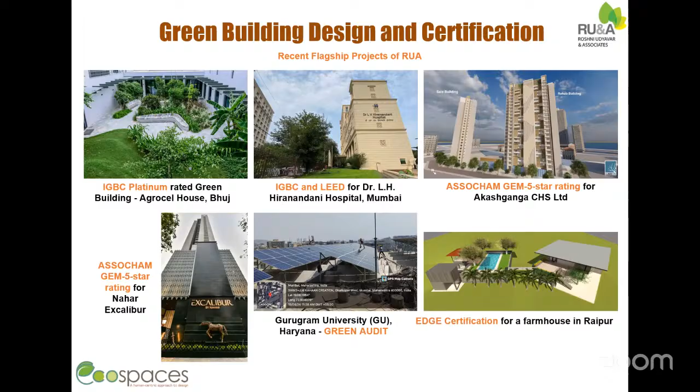So, water. Water is among our most essential resources, yet it is becoming increasingly scarce and unpredictable. Cities worldwide are grappling with water stress driven by urbanization, population growth, pollution, and climate change. Closer to home, India is already feeling the effects. This year, several regions of Maharashtra, including Mumbai, experienced delayed monsoons, raising concerns about reservoir levels and long-term water security. A reminder that fresh water cannot be taken for granted.

As architects, planners, engineers, environmental professionals, industries, institutions, and citizens, we all have a role to play. Wastewater treatment and reuse are no longer optional. They are essential to resilient and sustainable urban development. Today's webinar explores how modern treatment technologies, innovative solutions, regulatory frameworks, and best practices can help us move towards a future where water is conserved, recycled, and reused responsibly.

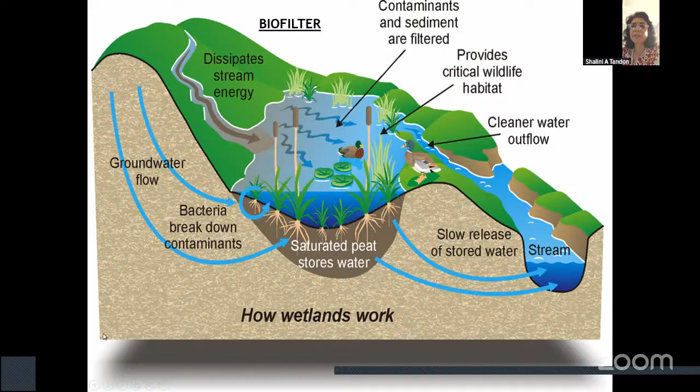So what we are doing is we are just mimicking this natural biofilter in an urban and a rural setting. Next slide, please. Now, role of wetland plants. Wetland plants are natural cleansers. So what we use are wetland plants which are rooted and emergent.

Now, these plants have an aerenchymatous tissue, which is an air space system within the roots and the shoots of the plants. This functions like a reverse chimney. It transports oxygen from the outside atmosphere via the shoots to the roots for root respiration, and the gases which are generated in the media are transported via the roots to the shoots to the outside atmosphere. So that is why we need to select wetland plants for remediating wastewater.

Nutrient uptake is governed by the rate of respiration of the roots, so selection of plant species is important. The more extensive the root structure, the more is the rhizosphere area, the more is the interactive area, and more cleansing will happen. Next slide, please.

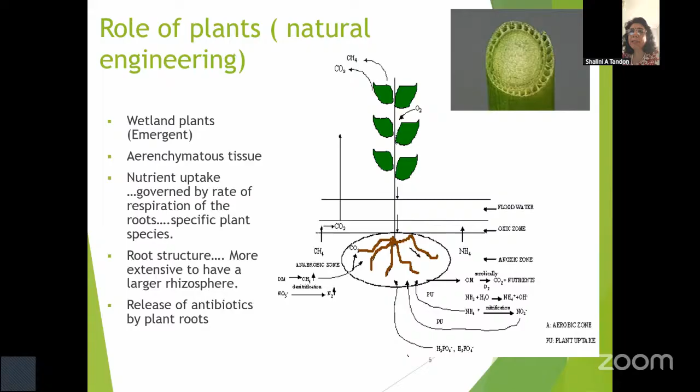So there are various wetland plants that can be used, which are locally available. There is elephant ears, colocasia, we have palm umbrella, we have cattail, canna, spider lily, cyperus, scirpus, many. Whatever is available locally should be used as it is adapted to the local climate.

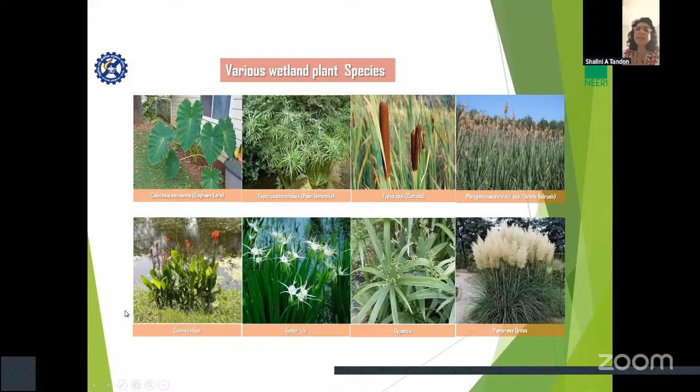Next slide. Now, hydrophytes, getting a little in depth of it, hydrophytes have special characteristics, especially those plants which are submerged and floating plants. They have a thin cuticle, stomata are open most of the time. They have a large number of stomata on either side of the leaves, and they have a less rigid structure because of the water pressure which supports them. They have flat leaves for flotation.

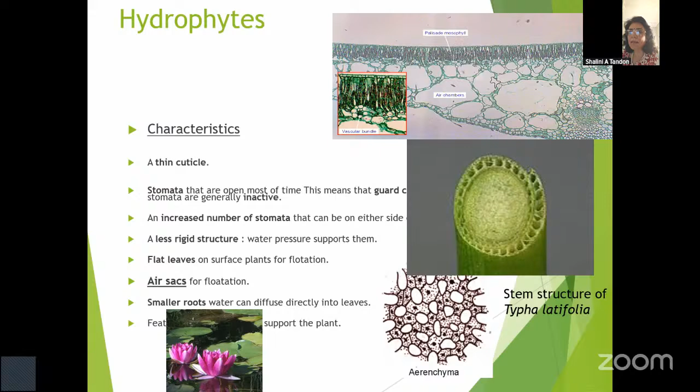Air sacs are a very important feature, and they have smaller roots because they don't need deeper roots to take up water. So these plants have special characters which make them suitable for remediating a wastewater system. Next slide, please.

Okay, so I'll be talking about two types of engineered wetlands: surface flow engineered wetlands and subsurface flow engineered wetlands. Now, surface flow engineered wetlands have a soil or a gravel bed, and the wastewater flows along the surface, allowing settlement of solids and coming into contact with the microbial population on the surface of the media and the plant shoots. So, the lower part of the plant shoots is in contact with the wastewater that needs to be treated. So as it passes through this, it gets cleansed and we get much cleaner water in the outlet.

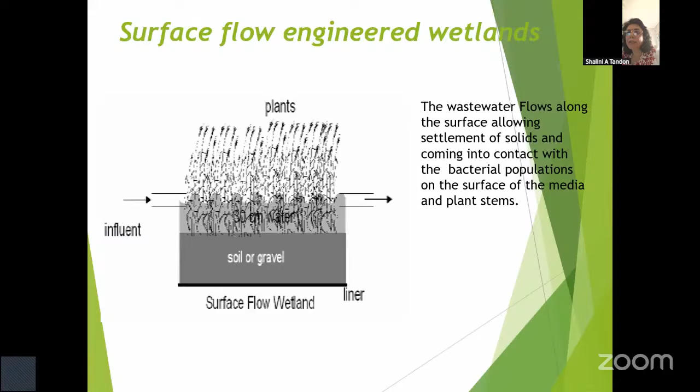Next slide, please. The second is the subsurface flow engineered wetland system. Here, the wastewater flows through the soil or gravel bed media and comes in contact with the microbes on the roots and on the media. An inlet zone of large media ensures influent liquid is distributed effectively into the media, and a similar outlet zone collects the treated liquid in a drainage pipe. So, in this case, you can't see water flowing over it. Everything is happening beneath the surface.

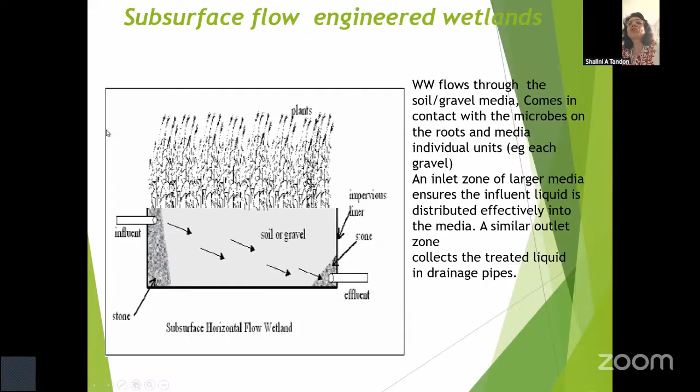So, the advantage is that a larger volume of wastewater is being exposed to the gravel bed or the soil bed and the plant roots. So efficiency becomes much higher. Now the basic, next slide. The basic units are a sedimentation tank, a planted bed, and a treated water collection tank.

In the sedimentation tank, the wastewater is collected and the suspended settleable solids will settle down, and the overlying wastewater having dissolved organics will be transferred to the planted bed where you have emergent rooted wetland plants in a gravel bed system. As it passes through it, the nutrients are taken up by the plants. The microbes will act on the organic matter and convert it into nutrients in the plant available form, and the treated water then moves out into the collection tank.

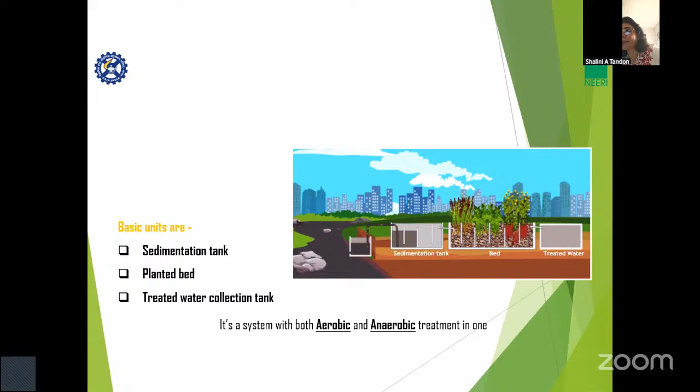Next slide, please. This is the planted bed, which has graded gravels and baffles. Now, these baffles actually provide a sinusoidal movement of wastewater through it. So, when the wastewater enters the system, it goes vertically down, then it flows horizontally, then vertically up. And like that, in a smaller surface area, we can have a higher treatment time. The footprint reduces. And as the water passes through it, it interacts with the roots, the microbes, and the plant will take up the nutrients.

The microbes will act on the material, will convert different forms of the plant nutrients, organic matter nutrients, into available form, and these are taken up by the plants. And likewise, the water that you get from the outlet is much cleaner, has much lower COD, BOD, even the fecal coliforms are less, and the nutrient level is also less.

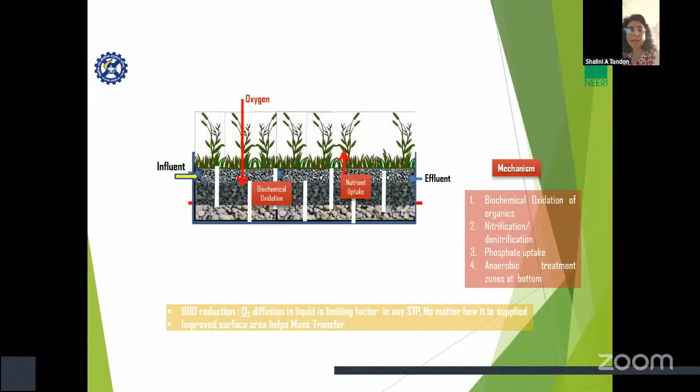Next slide, please. So I've been working on phytoremediation and bioremediation for a number of years, and there are a lot of research papers, a lot of work I have done. And now in this webinar, I had to select what to show you all. So actually, I've selected only two, three things which I have done for this presentation.

So this is a phyto-bioremediation system, and this work was on methane emission potential and increased efficiency of a phytoremediation system bio-augmented with a bacterial species. Now, this bacterial species I had isolated from municipal wastewater which was being treated in an engineered wetland, and from there only I isolated it.

And in the horizontal subsurface flow constructed wetland mesocosm study, the mesocosms, which are designed to treat municipal wastewater, were bioaugmented with Bacillus firmus. The efficiencies of the mesocosms were assessed. We had a non-vegetated mesocosm, a constructed wetland with Schoenoplectus validus wetland species, and the third one was with Bambusa vulgaris, and they were assessed.

We found that bioaugmentation not only enhanced the efficiency of phytoremediation, the cleansing capacity of the system, but also reduced methane emission from the planted mesocosms.

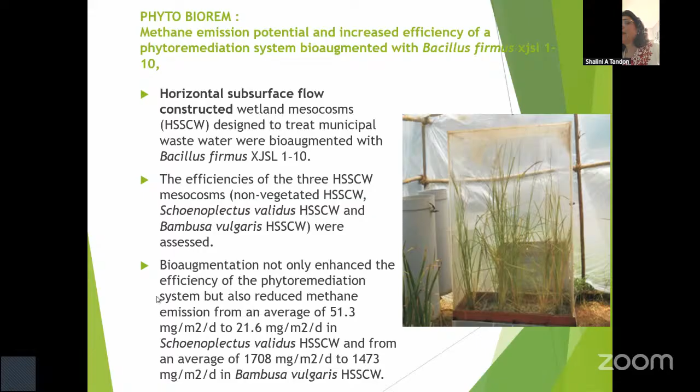Next slide, please. Another study was optimizing the use of a bacterial species for treatment of municipal wastewater. A bacterial strain was isolated again from municipal wastewater. The isolated strain was used for treatment of sewage in system one, an aerobic system provided with external aeration, and it was also immobilized. It was immobilized as calcium alginate beads, and later on I immobilized it on polyurethane foam also. And we got around 50% higher BOD and COD removal over the non-bioaugmented systems.

Now, immobilization becomes important because each time you don't need to add fresh inoculum, and it doesn't come out into your treated effluent. So that becomes easier. And also in the immobilized form, they are more resistant to stresses, more resistant to toxic substances and antibiotics if they are present in that water.

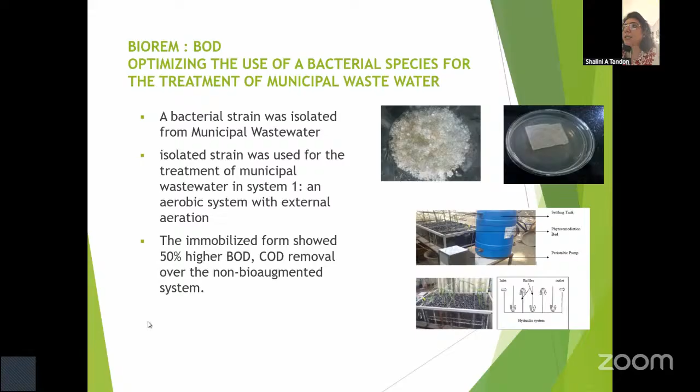Next slide, please. System two consisted of an upflow aerobic reactor without external aeration. And we found with 10% inoculation, the removal of BOD and COD was 30% higher than in the non-bioaugmented system.

Next slide, please. The third study was on removal of chromium. You know that wastewater has heavy metals also; it's a big problem. We did a study on Ochrobactrum pseudintermedium, which I isolated from municipal wastewater, for the removal of hexavalent chromium through different immobilization techniques. Chromium 6 is one of the toxic heavy metals which persist in the ecosystem. Heavy metals cannot be degraded into non-toxic forms, and they continue to create serious global health concerns.

A bacterial strain isolated and identified as Ochrobactrum pseudintermedium was found to be tolerant to concentrations of chromium 6 up to 600 milligrams per liter in nutrient media. Calcium alginate and polyurethane foam were two different materials used for immobilization. At a higher inoculum concentration of 5%, removal of chromium 6 increased, showing 82 and 86% removal by the calcium alginate and polyurethane foam methods.

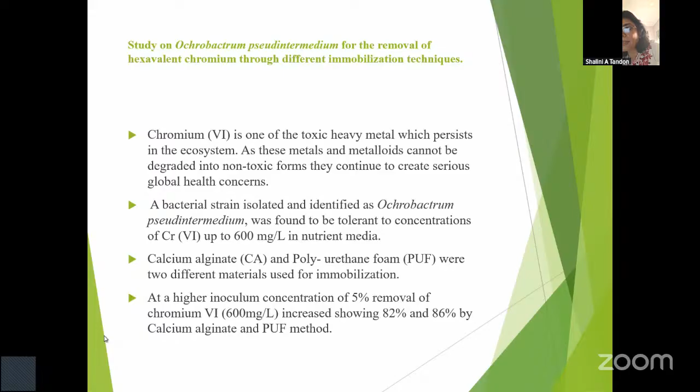Why am I telling you this? Because if we have certain specific bacteria which are efficient in removal of a particular contaminant, we can immobilize them on the support media. And we can use that support media as a bed material in a phytoremediation system. So as the wastewater passes through it, with the selected plants that we are using, the wastewater will get cleansed more. That particular contaminant will be removed more efficiently.

More efficiently means if it takes, say, 2 days for it to be cleaned, it can be cleaned in, say, 12 hours. If you just use it randomly, then biofilms of all different kinds of bacteria will be formed on the media, so the removal efficiency of the contaminant will be much lower.

Now, why are phytosystems so important? When we compare them with the conventional treatment systems, the percentage of BOD removal is highly comparable. And in a phytosystem, you won't find sludge formation, which is there in other systems. The equipment requirement is also minimal. And operationally, we don't need a skilled operator to maintain it. Even a gardener can look after the system because it integrates into the landscape.

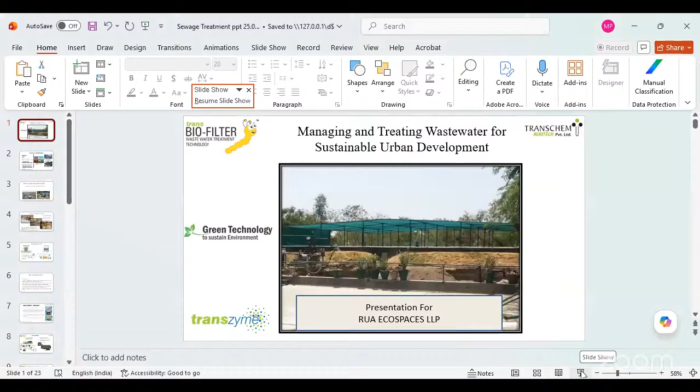So, Roshini has set a good tone in the beginning regarding the main objective of organizing this webinar: to understand the managing and treating of wastewater for sustainable urban development. Now, when we talk of any wastewater, it is very important for us to understand the sources of... I'm not able to.

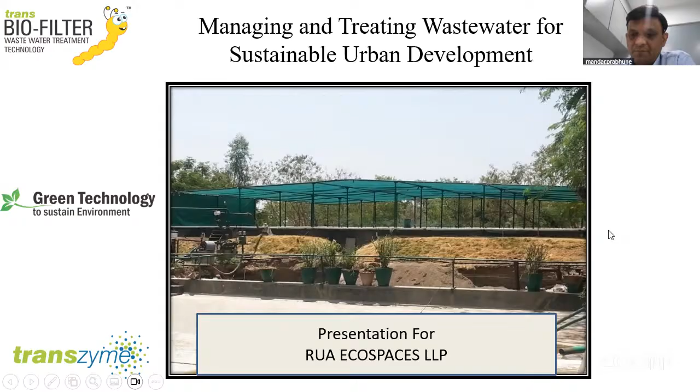So it is very important for us to understand the various sources of wastewater. So any kind of human activity generally generates the domestic wastewater. So maybe it would be from the household activities, from the institutions, from hotels, from corporates, from industries, from everywhere, wherever we have any human activity, the wastewater generation is going to happen.

So whenever we generate this kind of wastewater, it is very important for us to understand what are the different characteristics of wastewater. Because unless we understand the characteristics, it will be very difficult for us to design any kind of a treatment system. So if we just have a look on the basic characteristics, mainly the domestic wastewater, which is coming from the household sources, basically contains almost 99.5% of water and only 0.5% of suspended solids.

Now, these suspended solids are the biggest threat to the environment because they contain the human waste, the residuals of the food what we generate from the household activities. There are certain kinds of chemical contaminants which come mainly from the use of detergents, from various medicines and other personal care products. All those come as excreta out of our household activities. So if we want to design any kind of a treatment system, we need to understand properly the wastewater characteristics.

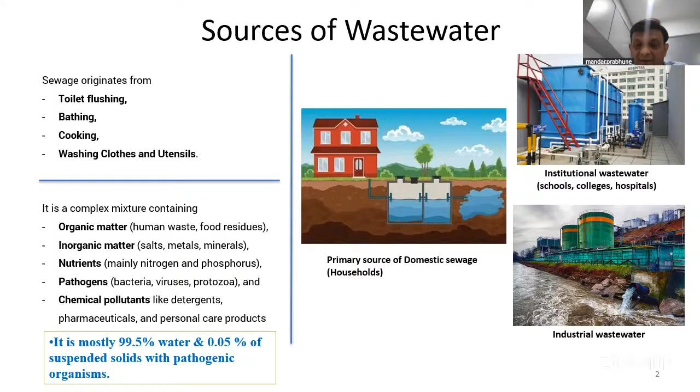So what is a sewage treatment plant? So any kind of a facility or a process where we can treat the sewage is basically known as a sewage treatment plant. So like we have industrial effluent treatment plants, when we talk of domestic wastewater, we call it a sewage treatment plant. So the sewage treatment plant can be established at various levels, maybe at the town level, at the city level, or in the urban, rural areas, or in various industries, hotels, institutions, colleges, schools, etc., from wherever it is generated.

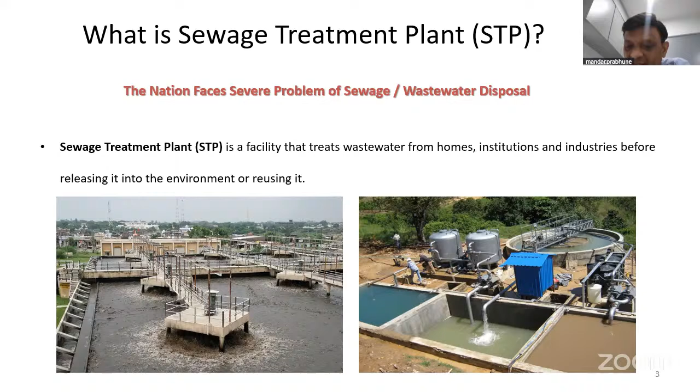So why do we need to have a sewage treatment plant? So basically to protect our water bodies like rivers and lakes, to prevent the water pollution, to protect the human health. And of course, if we try to treat this, then definitely this water can be reused back. So that is the reason we need a proper, well operated and well functional sewage treatment plant, because when we talk of characteristics, I told you that 99.5% is water. So if we are able to reclaim this water after proper treatment, the whole 99% of water can be recycled back. And the recycling can take place at various places.

It can be used for various applications like gardening, for landscaping, for toilet flushing, for industrial applications. So there are a number of applications where we can use this reclaimed or reused water. So basically these STPs remove the organic matter, the solids, the pathogenic organisms which are mainly harmful to the environment, and other pollutants are treated in the sewage treatment plant.

There are various technologies which are available for sewage treatment. So the conventional methods like MBBR or SBR, or MBRs are the latest technologies where we can treat the sewage properly. Also, there are certain green technologies and natural systems like constructed wetlands. Dr. Shalini also just mentioned phytoremediation. So phytoremediation also is one kind of a constructed wetland. It is also commonly known as root zone technology or the Phytorid technology.

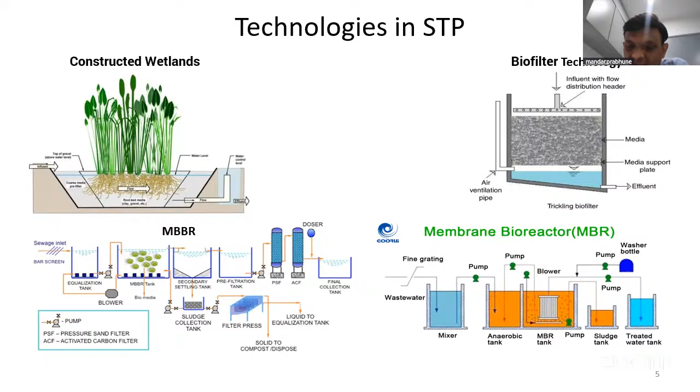Similarly, we have a biofilter technology which we have developed over the last 10, 15 years. And after studying various technologies and their limitations, we have tried to develop such a technology which is able to take care of all the limitations of the other systems.

So the basic requirement today is of decentralized sewage treatment plants because, when we talk of the centralized STPs, there are a number of challenges and limitations to handle a huge quantum of sewage which is generated and transported from one place to another. So it not only costs much, but also it allows a lot of leakages in the sewerage system. So that is the reason there is pollution on the land also, and when it comes in contact with the water bodies, it contaminates. So it is always better to treat the sewage at the source. And when we talk of at the source, then the decentralized or the smaller systems come into picture.

So if you want to really reuse the water, the decentralized systems will be much better to handle, also in terms of the volumes, and of course you get recycled water there itself. So there are a number of advantages if we can plan properly decentralized STPs, and in many of the regions there are no properly laid sewerage lines.

So that is the reason you see the pockets of wastewater like in small ponds or some kind of ditches which are there, and there the treatment is not happening, and that is the reason we face the water pollution issues. So if we really want to reduce the issues of wastewater, definitely we should think of decentralized systems, and particularly in a country like India, the decentralized systems are much more effective than the centralized systems.

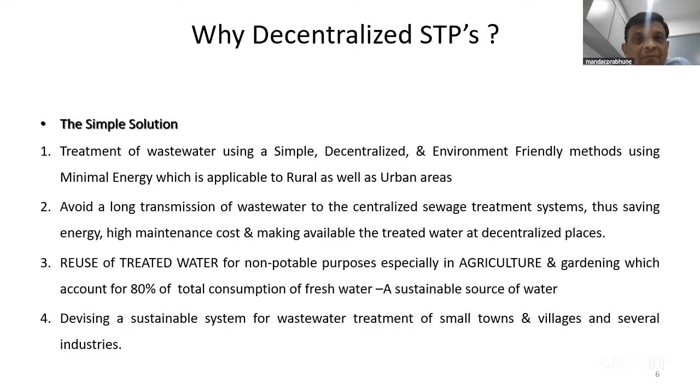So here today I will be talking to you about the biofilter technology which we have developed over the last 10-15 years. And basically the idea is to develop such a technology which is much more user friendly. It is completely green, and that is the reason our concept is design with nature. So that is how the natural system works best, but definitely we have also taken certain scientific learnings from modern science, so that combining both nature and science, we are able to get a

very effective treatment system. So basically, the biofilter system utilizes the ability of the earthworms and beneficial microbes. We have developed specialized microbial cultures known as transzyme, where the organic waste is broken down into harmless components, into available nutrient forms. So here the main processes take place, which are mainly adsorption, filtration, and biological degradation.

Here we use specialized media, which is completely organic in nature. The main function of the media is to adsorb the suspended solids which are present in the wastewater. Unlike in other systems where you require a sedimentation process earlier, in our system there is no requirement of sedimentation. All the suspended solids present in the wastewater act as food for the earthworms, and in turn earthworms digest those suspended solids and convert them into good compost and generate millions of beneficial microbes which are mainly required for the biological degradation process.

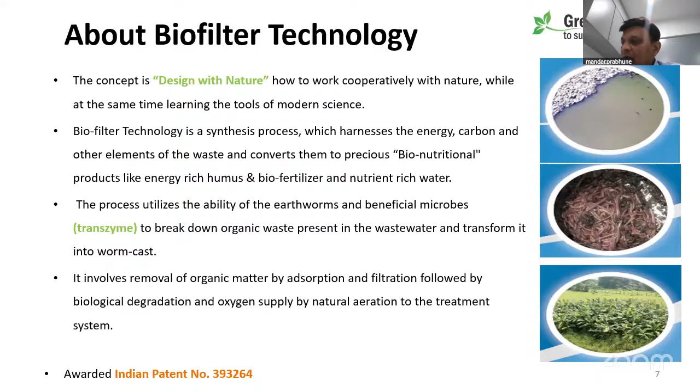Recently we have also got the patent on this technology, so our Indian patent number is also mentioned in the presentation. So if you see the comparison between the conventional STPs and the biofilter system, you can see in conventional there are a number of unit operations. Like you require primary sedimentation tank, the aeration tanks. Then after the aeration tank, you require clarifiers, and then the disinfection system.

While the biofilter system is a one-step reaction or process where you don't require a sedimentation tank. You just have to put a strainer which can take care of the non-biodegradable material like plastics and some other glass or metal parts, which are removed through the strainer, and only the biodegradable wastewater is treated through the biofilter system. So in one step you are able to treat the sewage, and it's a continuous process, and the retention time is just 45 to 60 minutes to treat the water.

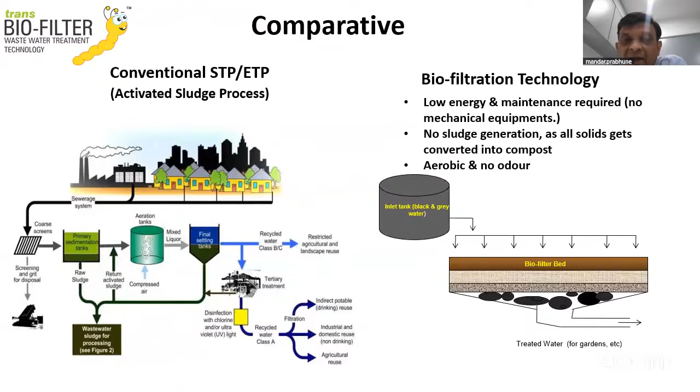And of course, the advantages are that it requires very low energy. There is not much maintenance required because there is no mechanical equipment. We don't require any aeration system or diffusers to be installed in the system. And as there is no sedimentation tank required, sludge is not generated. All the solids are converted into good compost with very nutrient-rich components, which can directly be used as a solid fertilizer for landscaping, or even for agriculture purposes. And it's completely aerobic, and there is no odor in the system.

So as I mentioned, it generates nutrient-rich water, vermicompost, and earthworm biomass. There are no chemicals added in the process, absolutely low maintenance and low energy input, as there is no mechanical equipment used. No unhygienic sludge disposal required because all the suspended solids are converted into good compost. There is no odor, no noise in the system, very less HRT in comparison to the conventional system, and it can be implemented at decentralized level with economy of scale.

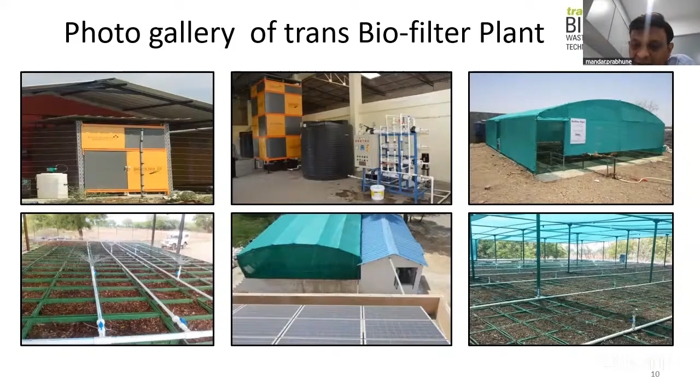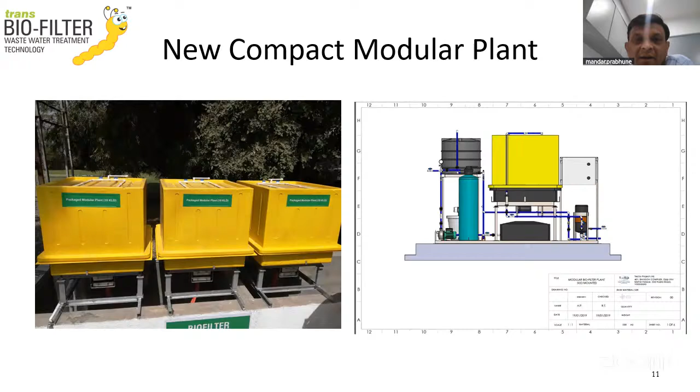See, these are some of the modular systems which we have installed. So right from 5 KLD to 1 MLD systems, we can design based on the requirement. These are all compact modular plants. This is one of the systems which we have installed in one of the ITIs near Vadodara in Gujarat. So we have just made a stone pitching tank, and inside that we have filled the media and the required cultures. So depending upon the locations and site conditions, the designs can be made.

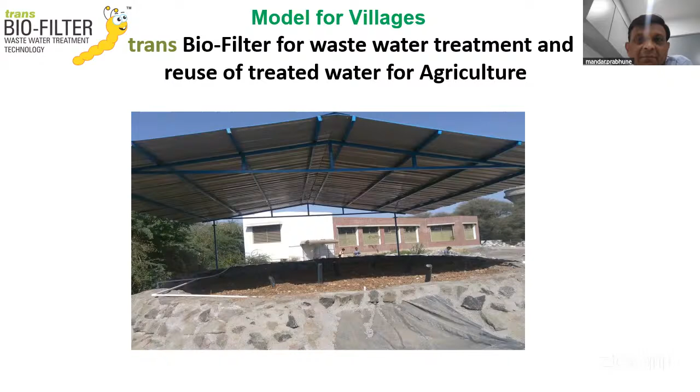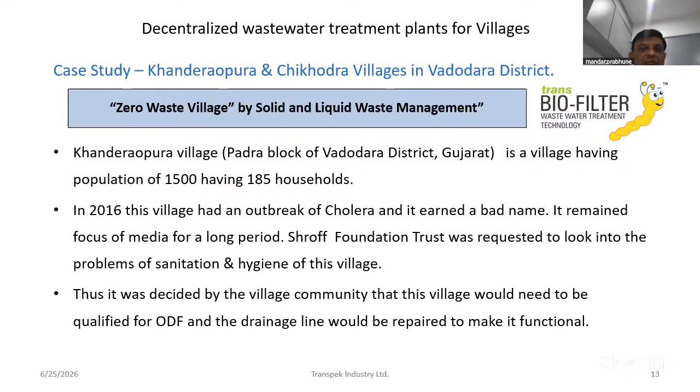In one of the villages also we have installed these systems, where the rural wastewater can be converted into usable water and is used by the farmers for agriculture purpose. So this is the plant which is installed in a rural area in one of the government schools, where students are also studying, and you can see that just adjacent to the school we have installed the plant. That basically gives confidence that there is no odor generation or any nuisance value of the sewage treatment system. The capacity of the plant is around 120 KLD.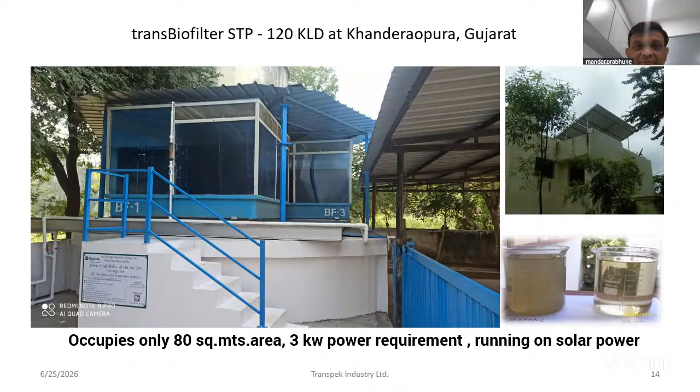One of the other plants was inaugurated by the Chief Minister of Gujarat, of course now he is no more, Mr. Vijay Rupani, but he inaugurated this plant in 2019. That is also a 120 KLD plant in rural areas.

So one of the important aspects of the biofilter system is that it is a resource of nutrients. Whatever nutrients we have in the sewage can be converted into available form. So nitrogen, phosphorus, all these are good nutrients available to be used. So if we use this water in rural areas for agriculture, definitely there will be much reduction of chemical fertilizers and you can get better yield. And also the soil conditions can be properly maintained.

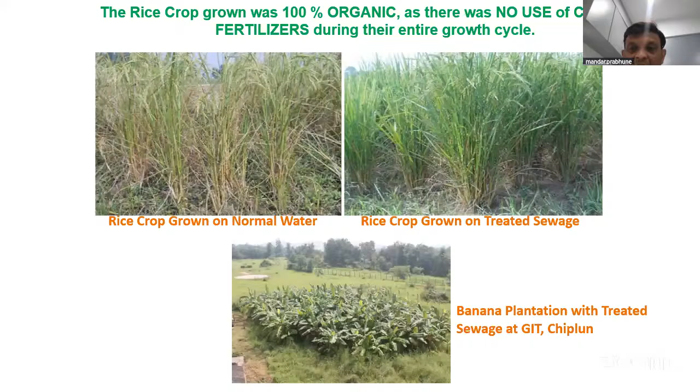So these are some of the practical applications of the wastewater, where farmers have used this water for rice crop plantation. And also in the bottom, you can see the banana plantation, which has been developed with the reuse of this water. This banana plantation project is in Chiplun in Maharashtra.

We have another plant of 100 KLD in Krishi Vigyan Kendra in Jalna, Maharashtra, where the plant is solar based. The source of water is the nearby nala, and it is treated through the biofilter system. Then in their model farm, they are using it for cultivation of various grass species. And Jalna being a very water-stressed area in Maharashtra, this is a good reuse water they are able to use.

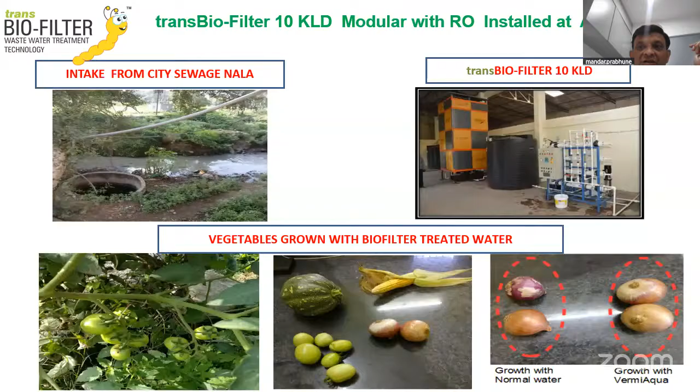These are also some of the other installations in Aurangabad, where farmers are using this water for growing vegetables and other horticultural plants. And we have also installed a post RO system where you can further purify this water, and it can be used even for other applications like flushing or industrial application.

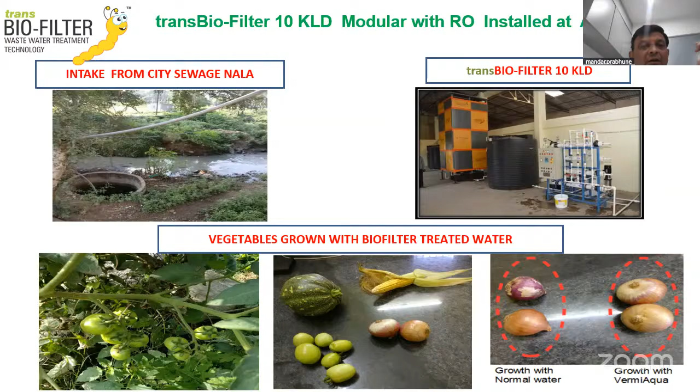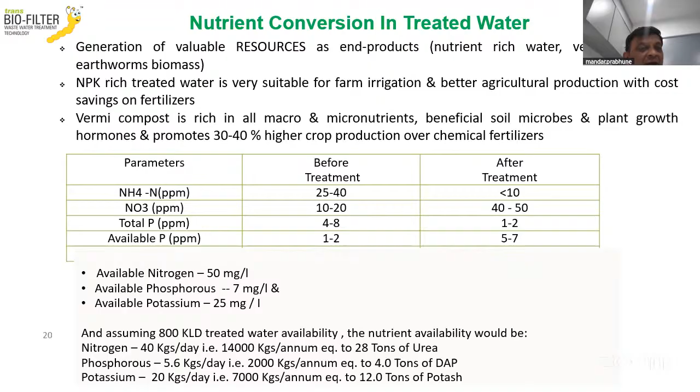So this is the kind of resource generation or the nutrients you can get from this water. If you have a capacity of around 800 KLD to 1 MLD, you can get up to around 14 tons of nitrogen, equivalent to 28 tons of urea, 4 tons of DAP and 12 tons of potash. So you can imagine what kind of nutrient availability this water can give you if you properly manage the system. All these fertilizers can be used through irrigation, and against that, you can reduce the use of chemical fertilizers.

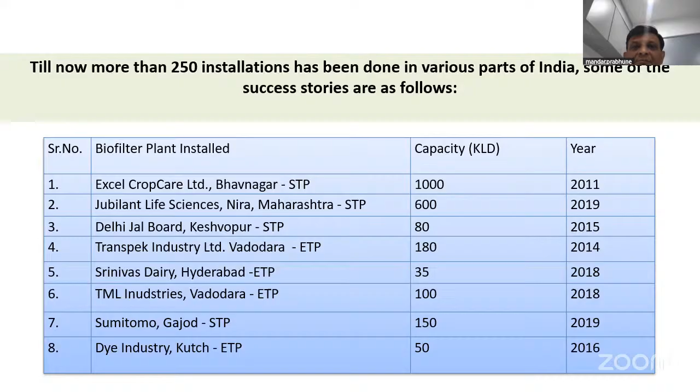So till date, we have installed more than 250 installations. Recently I think we have completed more than 300. So from 50 KLD to 1 MLD, various sizes we have installed at various places on a pan-India basis. We have received various awards for this technology from institutes like ASSOCHAM, we have also received the SKOCH Award, and recently an award from FICCI. So various best technology awards we have received, which have been cited here.

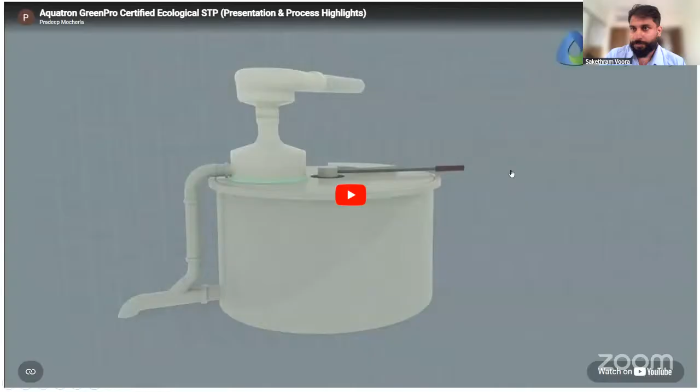Please tell me if the sound is working. Yes, sir. It is working, sir.

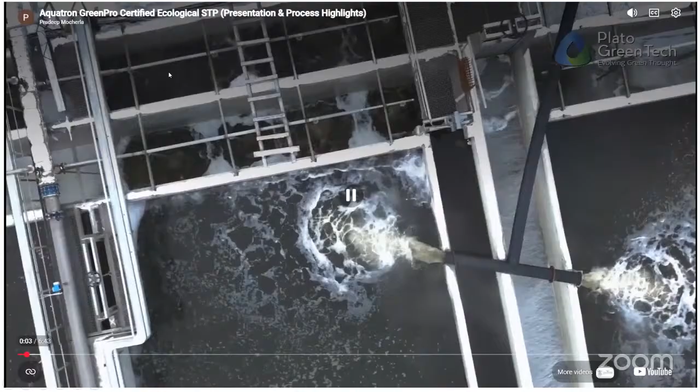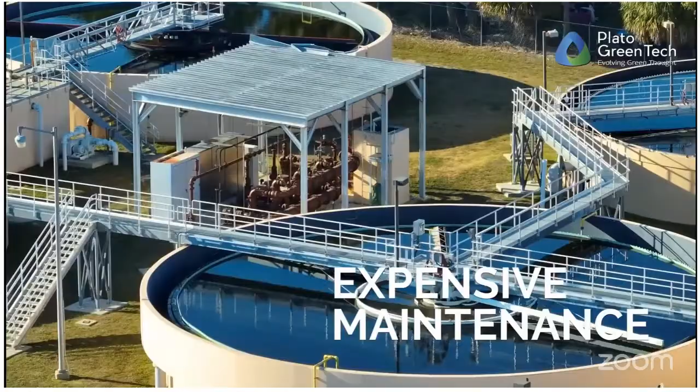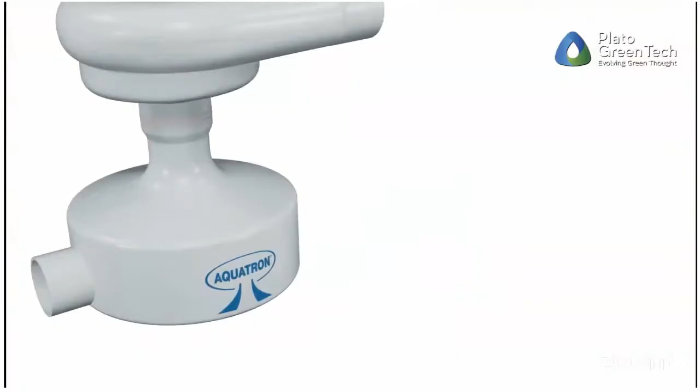What comes to mind when you think of sewage treatment? Sludge, smell, high setup cost, expensive maintenance, unproductive space, and high power consumption? There is a solution for all of these issues. Aquatron, the award-winning, patented, and GreenPro certified instant solid liquid separator, loved by customers worldwide since 1986.

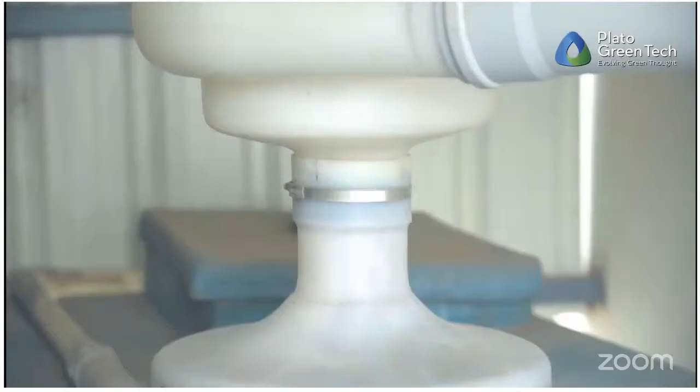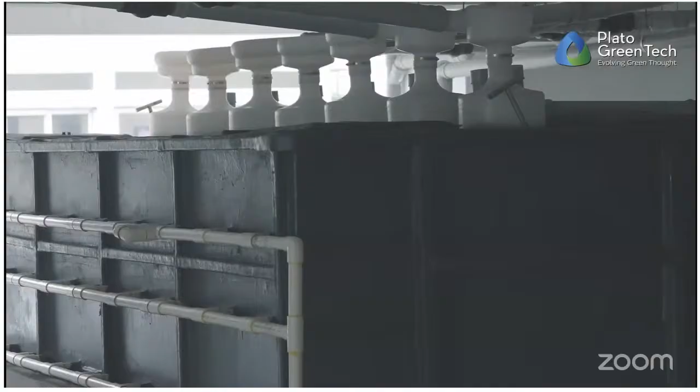Aquatron has made waves both locally and globally with over 15,000 installations worldwide and an impressive 200 installations in India. Aquatron, nature-inspired wastewater treatment, employs a revolutionary approach to eliminate the formation of sludge by instantly separating fecal solids from flushing water. And this is the unique basis for our sludge and odor-free sewage treatment systems, easier STP maintenance, as well as a reduced STP space footprint.

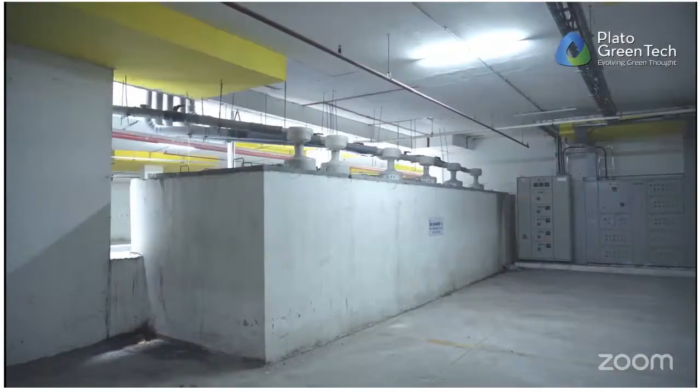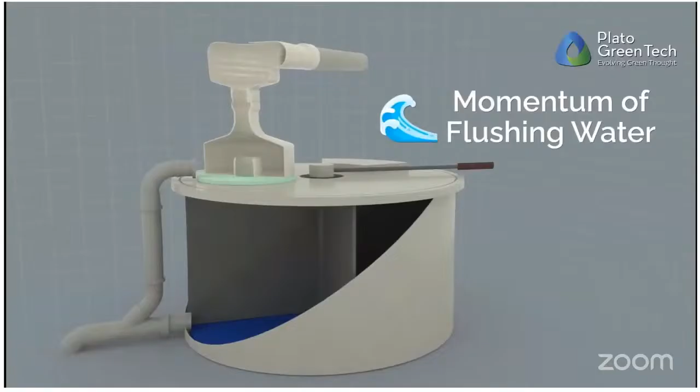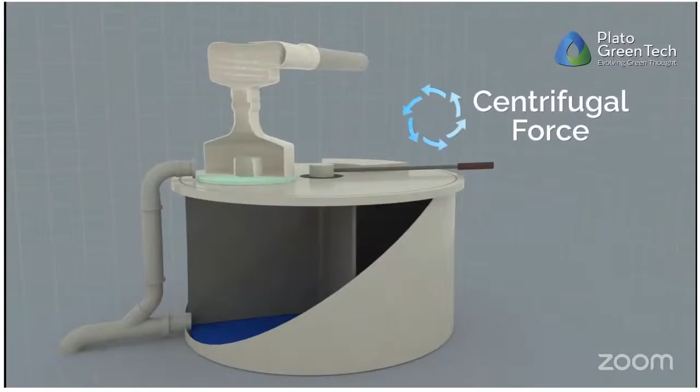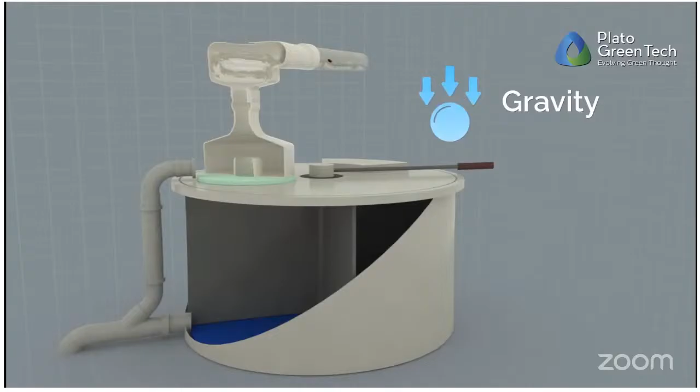The separation process relies on three fundamental natural principles. Momentum of flushing water. The momentum of flushing water is utilized to create centrifugal force naturally. Centrifugal force. The design of Aquatron harnesses centrifugal force to effectively route all liquids to a designated side outlet. Gravity. The force of gravity makes sure that the solids can't get out of Aquatron along with liquids, but inevitably fall in a dry biochamber for natural composting.

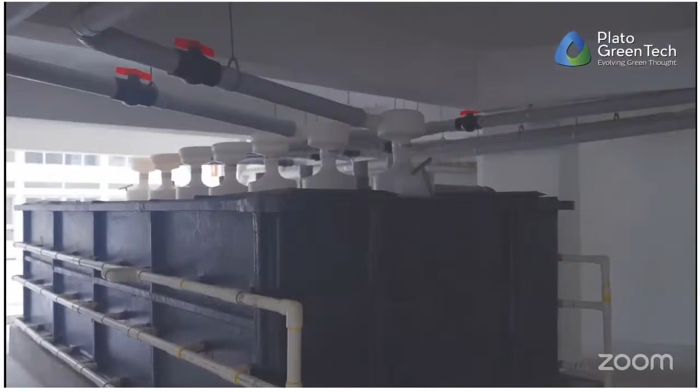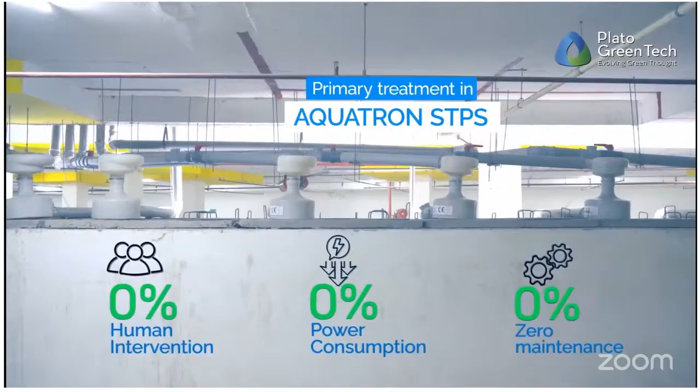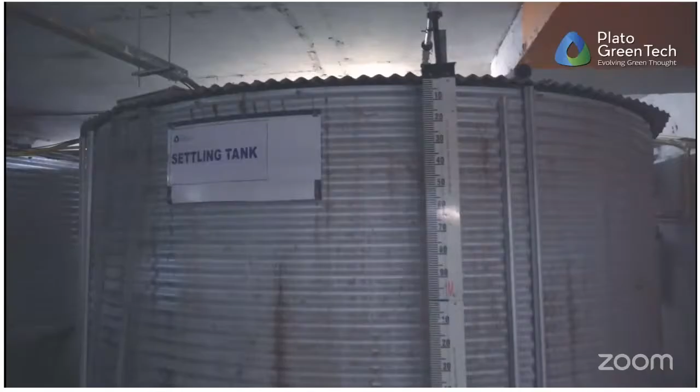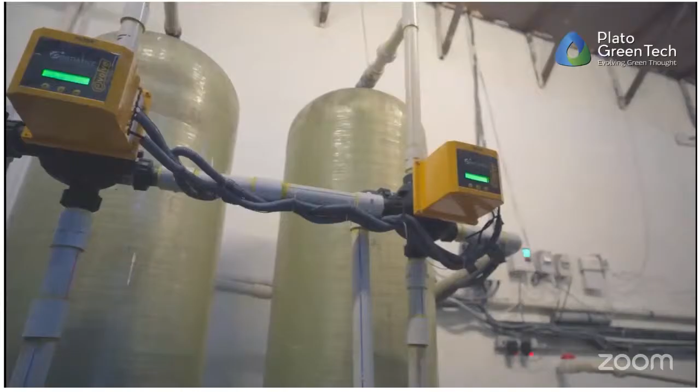The first stage of treatment in conventional STPs usually involves recirculation pumps, sludge presses, and so on. But natural solid-liquid separation by Aquatron achieves the same end result with zero human intervention, zero power consumption, and zero maintenance-intensive machinery. And on top of that, Aquatron yields hygienic, odorless manure instead of smelly sludge. In the second stage of treatment, aeration and filtration, Aquatron STPs achieve the same treatment result as conventional STPs, but with up to 75% less power consumption and a fully automated process. This is possible because inlet water quality has already been improved with solid-liquid separation, and there is simply less pollution to treat.

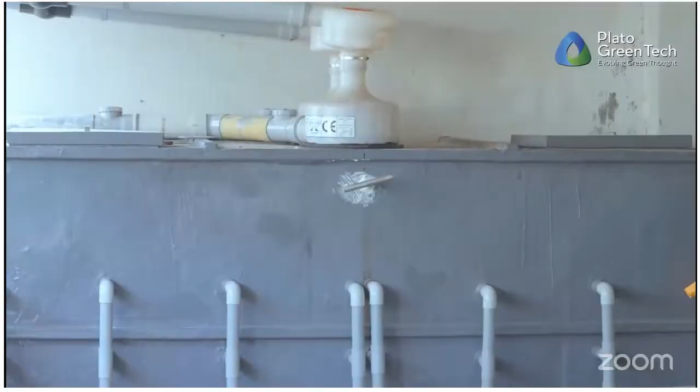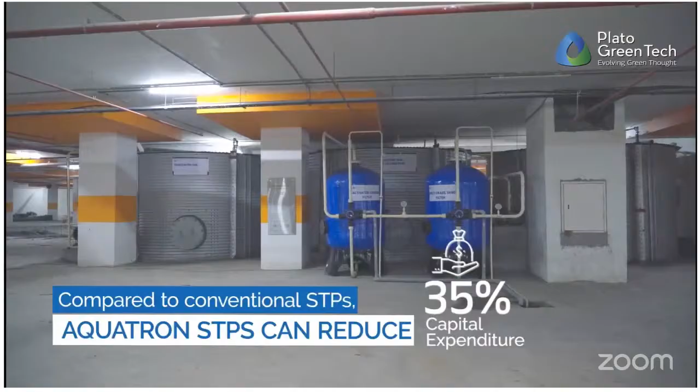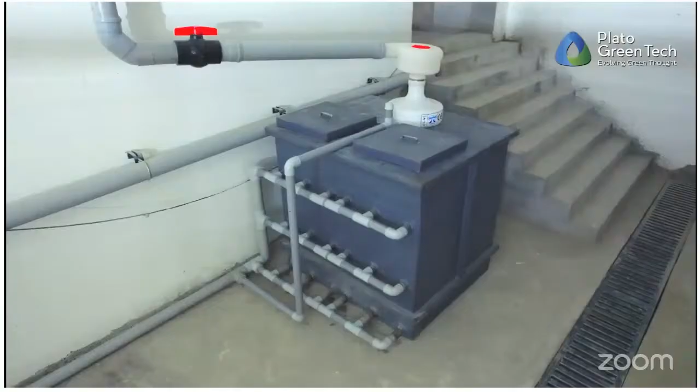Compared to conventional STPs, Aquatron STPs can reduce capital expenditure in tanks by at least 35% and overall operating cost by 90%. Aquatron also minimizes the space footprint of the sewage treatment plant. Aquatron can be scaled up for any capacity from 0.5 KLD to MLDs, and it is suitable for all types of buildings from apartments, villas, high-rise townships, zero-discharge facilities, clubhouses, offices, factories, ashrams, malls and hospitals to educational institutions, resorts, hotels, and so on.

Here are some of our clients who are already benefiting from our sustainable Aquatron STPs. WeWork, Gurgaon. Sun Pharma, Halol. Godavari Power and Ispat, Raipur. Sandhya Elite, Hyderabad. Safai International School, Noida. Shantilal Sanghvi Medical Trust Eye Hospital, Mumbai. Grape County Resort, Nasik. Sacred Grove Ashram, Madanpalle.

Residential: Modi Spaces, Mumbai. Vura Group, Chennai. Metropolis Gurukrupa Apartments, Bangalore. RNG Infra, Hyderabad. Retrofit solutions are also possible with ROIs as short as 8 months.

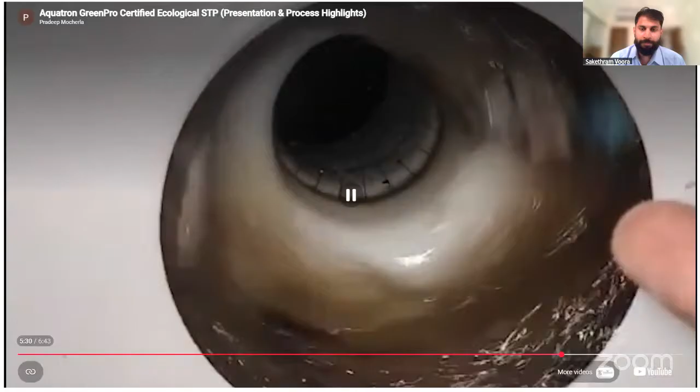And because of this, there are two important advantages. One is the speed of separation, which I would like to show you. So as you've seen, the speed of separation is instant. So due to the shape of the product, the solids fall down, and just due to gravity and centrifugal force, the water comes out from this side.

And the second main advantage is the quality of water. Because we're intervening at the source and not after the sludge is formed, the separation process gives rise to a water quality which is 3 to 4 times better even before the second stage of treatment.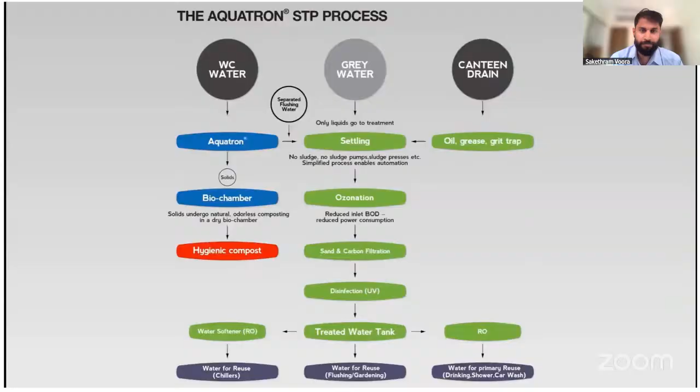And another advantage you see with the Aquatron chambers is that the solids that are instantly separated are stored in a dry fashion and they automatically convert into manure, unlike conventional STPs where there's a complete sludge management process.

So this is another huge sustainable benefit with the chambers because sludge disintegration gives rise to higher electrical requirements and methane and hydrogen sulfide production. Whereas now that we are doing a dry solid decomposition process, we do not produce those gases and we do not require any electricity to do so.

Yeah. So to explain why those two advantages, one being the speed and two being the quality, are advantageous: the speed being instantaneous removes 12 to 14 hours of your daily operation. So your daily operation in any conventional STP is around 20 to 24 hours.

So if I'm removing 12 to 14 hours of this treatment, that means the infrastructure required comes down by a minimum of 50%. And now that I'm removing 50% of your treatment cycle, I'm also removing 50% of your electrical consumption as a minimum. And then I'm also giving you 3 to 4 times better quality of water. So that means your electrical consumption also comes down by a minimum of 55 to 65%.

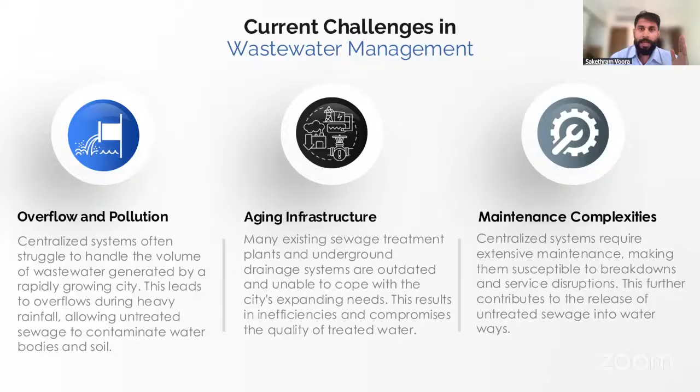But now, because as I've shown you before, the Aquatron does the instant liquid solid separation at the source, these are the benefits that I'm able to provide you. So one being sludge-free water bodies.

So as I said, because of the three previous problems, if you're letting go of sludge-filled water into your water bodies, that pollution is a heavy impact on the existing environment in that locality. One, because of your aquatic life. Second, you are effectively removing your sustainable use of, or a source of, water.

Second, many times you are not able to modify your current sewer network or modify your current STP because your sewer networks are now trying to deal with your rainfall, you're trying to deal with solids and liquids. Whereas by implementing the Aquatron at the road level, we're able to completely make your sewer network only for water, because the solids are going to be remaining where the Aquatron is positioned at the road. So now

traversing and countering varying terrains and varying contours become extremely easy. And now pumping stations don't require any pumps that have to take care of the solids, which heavily fail. We only require water transfer pumps. So your pipe dias, your networks, your network lengths, and your network sizes all immensely come down. So not only will people open their minds to implement STPs in more localities, we can also implement STPs by combining localities because we don't require the 2 to 3 times space that conventional STPs require.

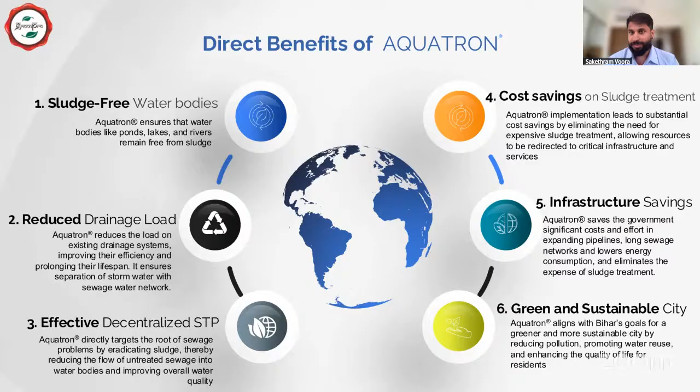So to go through the benefits, as I said, sludge-free water bodies, reduced drainage load, effective decentralization because they're at the road level, and then cost savings of the infrastructure. And to go to the indirect benefits that everyone would benefit from is obviously the reduced waterborne diseases.

So if the sludge goes directly untreated into the wastewater, it is going to develop many harmful bacteria. And if the locals were not aware and go use that water, they're going to develop many diseases like cholera, dysentery, gastroenteritis, etc. And then there are also many positive economic benefits like your land value going up, your water bodies becoming better, your requirement of treated water being lesser, and as a whole boosting all sorts of ecosystems around you.

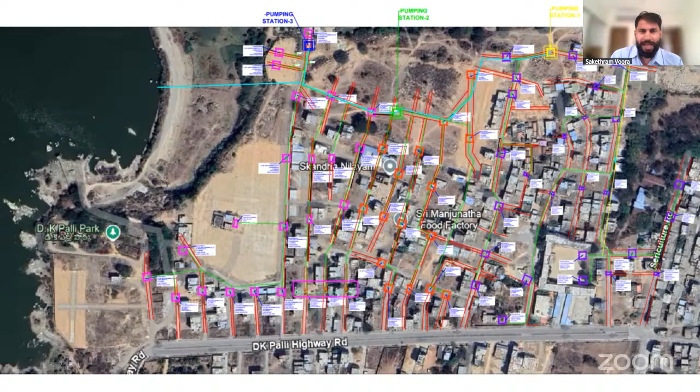And this is a very sample example of how an Aquatron chamber can look. And as you can see, there are 3 Aquatrons sitting down in this chamber. So this is a very specific example because in this road, we have a lot of buildings coming to this one location. And this is where the separation happens. And from here, we take the water to the STP.

So apart from all the benefits that I spoke of till now, which are the direct benefits, I would like to talk about the benefits to the climate at a massive scale. So one of the main reasons it's not being implemented is the size and the costing of the STP. Now that I'm able to solve those issues, if we're able to treat and retrofit the Aquatron throughout India to take care of India's complete sewage problem, we can do it by saving 1.45 million tons of carbon emissions.

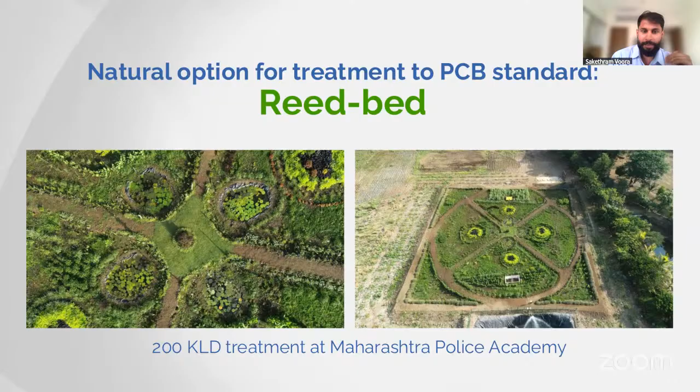So now the reed beds become even more economically viable and also space viable for people trying to implement it throughout India. And these are pictures of different reed bed implementations of ours. This is a 200 KLD treatment at Maharashtra Police Academy.

And different looks of how the reed bed can look and also not be an aesthetic burden on your projects. And I would like to conclude the presentation by coming back to the roots, by saying the solution is always in nature itself. The Aquatron STP, the solution that we have engineered, is a catalyst to bring us back to nature. And as you can see, these are the benefits, as I mentioned throughout the presentation.

We are a complete zero sludge system, a zero power system, a zero maintenance system, and there are zero mechanical moving parts. And because of the Aquatron STP, the complete downstream of the STP becomes extremely easier. So after that, whether you want gardening water, flushing water, drinking water, I can do it all by saving you money and space.

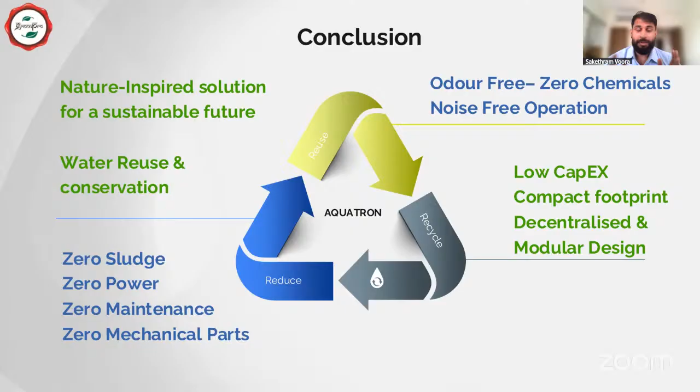Thank you, Saketh sir, for sharing those practical insights and innovative approaches to wastewater treatment. We have some questions for you in the chat box. Yeah. Okay, so yeah, 1 second. Let me just share my presentation again, because that would help solve one of the questions. Yeah, sure.

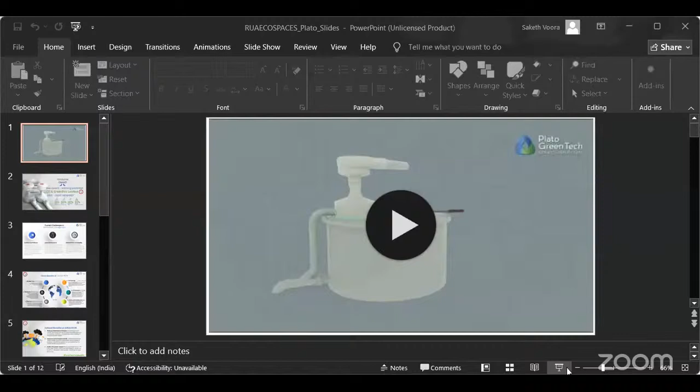Yeah, so to look at what happens to the solids, if you can see this design, this is more of a top view. I can share the sectional view after the presentation. So each chamber has a partition wall that separates a left and a right chamber, and these chambers are sized so that it takes around 1 to 1.5 years to fill each half of the chamber. So for example, there is a diverter rod diverting the solids to the left side for the first 1 to 1.5 years for the left side of the chamber to fill.

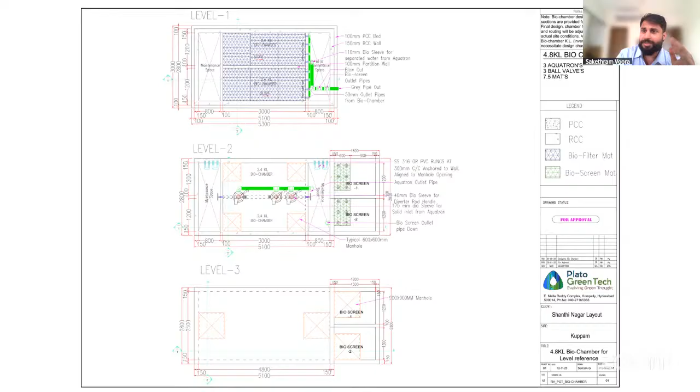So as soon as that side of the chamber fills, now the diverter rod is turned to the right. And now on the right side the solids are falling, and the left side, which is 95% full, is resting. So the thing is, even that 95% of solids do have 1 to 2% of moisture, which is again separated through the walls and the floor of the biochamber, because they have these plastic mats called matala mats. They do a really great job at oil, grease, and water separation from solids.

So even after removing the 2%, the 95% of solids that's sitting in this left chamber within 2 to 3 weeks will automatically decompose from 95% to just 5% of manure. And this cycle can be repeated 4 to 5 times, up to which you're able to get around 20 to 30% of manure buildup. And that's when you even have to do maintenance. That's why we are almost completely zero maintenance when it comes to solid management.

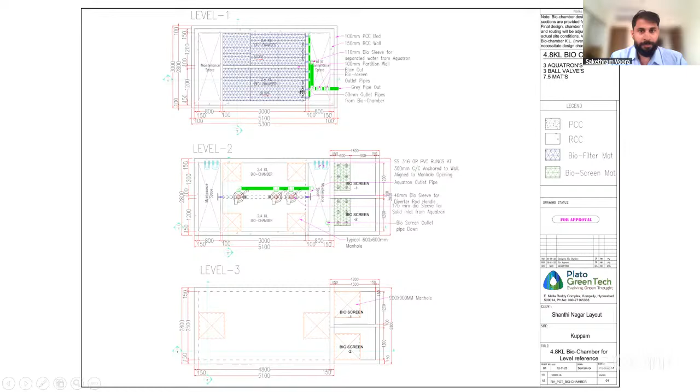And in conventional STPs, sludge management is a septic process, and you produce septic gases. But we are a completely dry aerobic reaction, so we only produce carbon dioxide, which is non-toxic and odorless, and it's completely hygienic. So this cleaning can just be done with your bare hands or just with a shovel. So that's to explain what happens to the solids, if that clarifies your question. Then the next one.

Okay, so can it be implemented at a single building apartment complex? If yes, what would be the approximate cost to install and maintain, assuming a project with 20 to 25 units? Yeah, so the thing is, my company does an A to Z holistic approach. So we are not just a vendor for the equipment. We do the plumbing design, the civil designs, the complete placement, and we also help with the execution. And we also provide the cost comparison in our preliminary proposals. And all of this is free of cost.

And so if I have to retrofit into an apartment like this, I would send my people, or I would come myself, look at the whole system, collect the drawings, do the design and come back to you regarding the cost. And to answer the question simply, yes, it's possible, but I'll have to come and see the feasibility depending on the space availability and the current plumbing systems used.

Yeah. So if you're interested in doing it, you can keep in mind that compared to any other STP, I'm going to be much smaller in size, at least 3 times smaller. So we would be your best bet if you're trying to retrofit an STP. And all my savings you can blindly take as true, because we have proved it over 200 times.